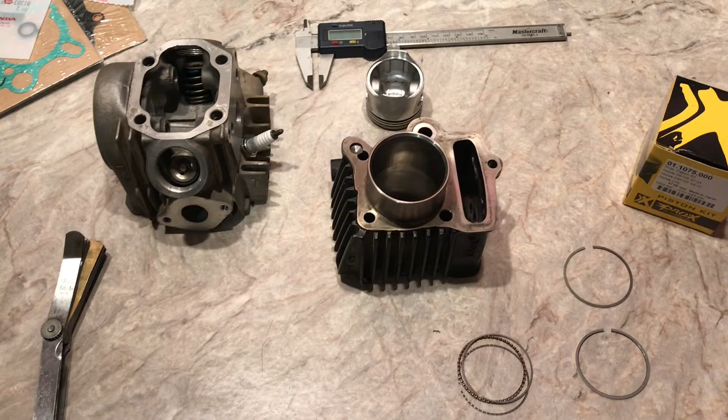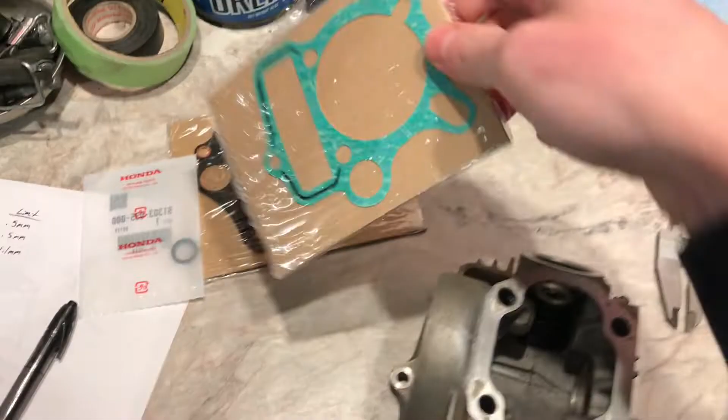Three months later, this COVID stuff is really messing up the parts supply. I waited like three months for this piston kit for this little CRF70, and I even have top end gaskets on order, some aftermarket ones, and they're still on back order. You can't get them in Canada right now. It's nuts. Initially I called Honda and they said a few months for the piston kit and gaskets, but I contacted them recently and they ended up having them in stock finally, so I figured we'll just get them.

I can hardly remember what I last got to on this little thing. I had cleaned the head, dumped it in my bucket of jet fuel, removed the valves, and replaced the valve seals, those little rubber guys in there. I scraped off what I could in the exhaust port, the carbon and whatnot, and quickly lapped the seats, but they really weren't that bad. So the head's clean and I got all the gasket surfaces prepared.

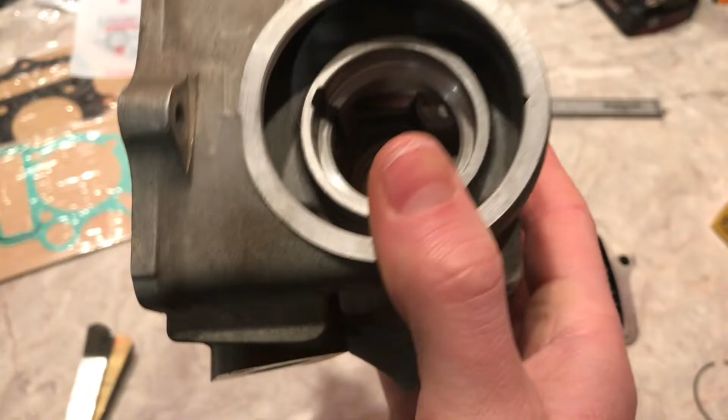For the cylinder, I'm essentially at the point where we go to check ring end gap before we start installing everything. Before installing any new piston, make sure you check these gaps on the new rings going in as well, otherwise you're going to cause big problems. But I wrote down what we're looking for here.

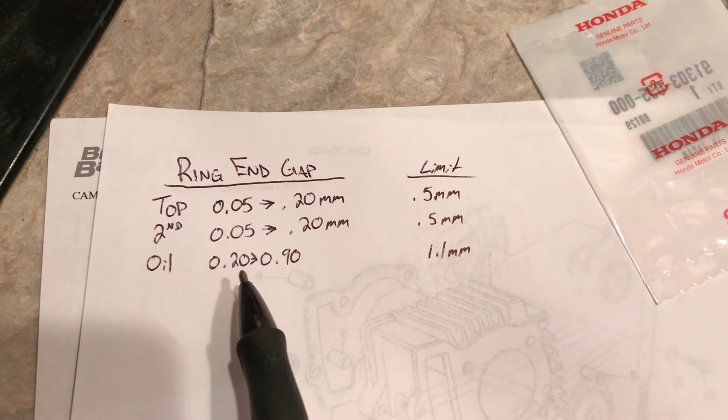So the top ring, this is all in millimeters by the way, is 0.05 to 0.2, same for the second ring. For the oil ring, you're not measuring the corrugated one since you can't really measure that guy too well, you're measuring this one and its partner. Make sure you check this before installing new stuff.

To do that, Honda wants them put in from the bottom of the cylinder, so I got it here. They don't really give a measurement in the manual that I see, so you just set the ring in. We'll do the top old one first. This thing is very worn, you'll see in a second.

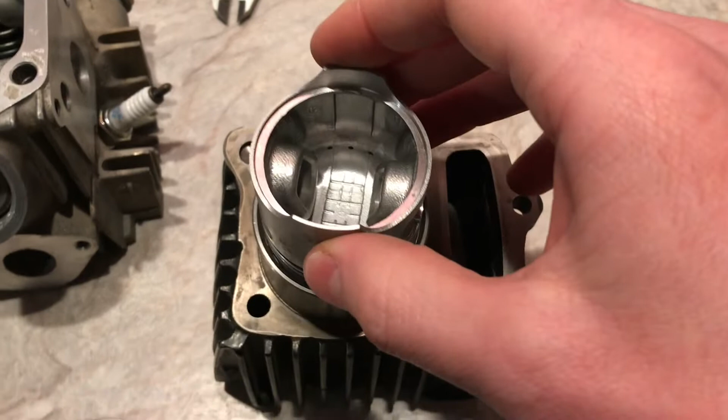Using the old piston just to make sure it's seated squarely in there. Look at that, that's not even... I could jam my whole feeler gauge set in that gap right there. Anyway, that's why this bike was running so poorly and burning so much oil.

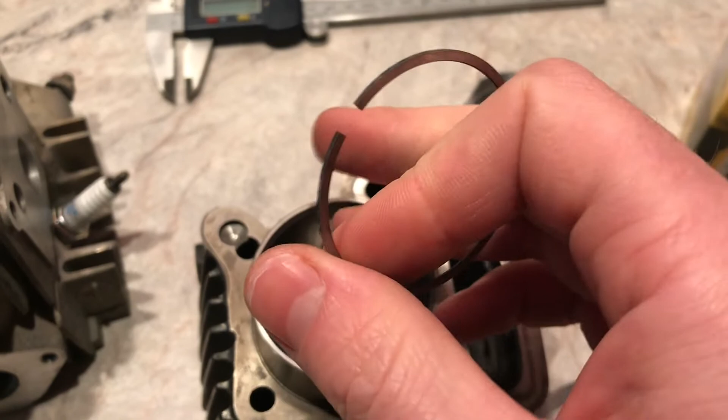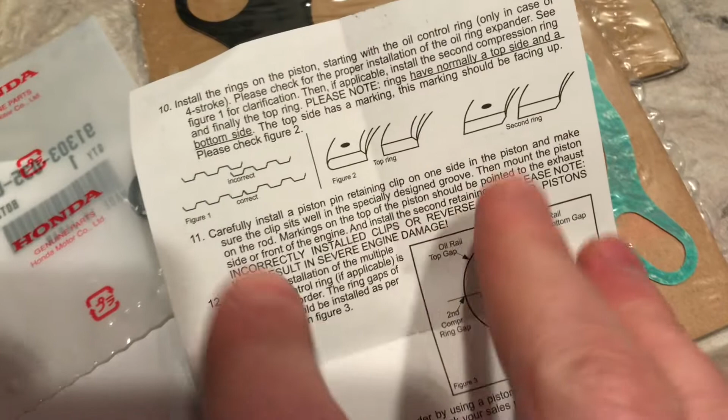So I got the new rings here. Here's these two without question, or these three I guess you could say - this is the oil ring. These two are much thinner and smaller, and if you're wondering which one goes on top and which on the bottom, Pro X and usually every piston manufacturer will send their little instructions with you. But you can see right here, the top rings usually have a bevel on the inside edge, a very slight bevel, and the second rings are usually a little more squared off.

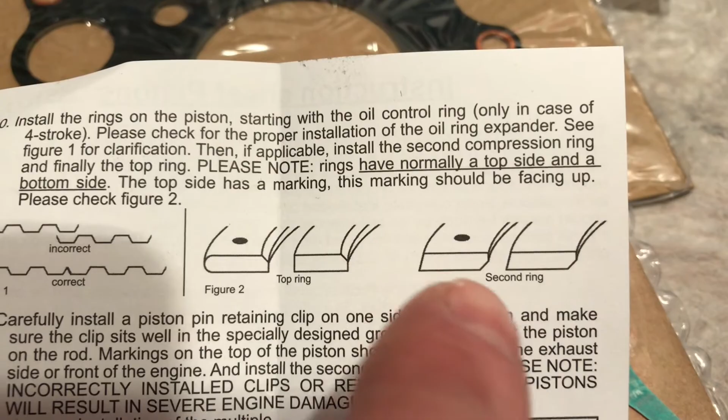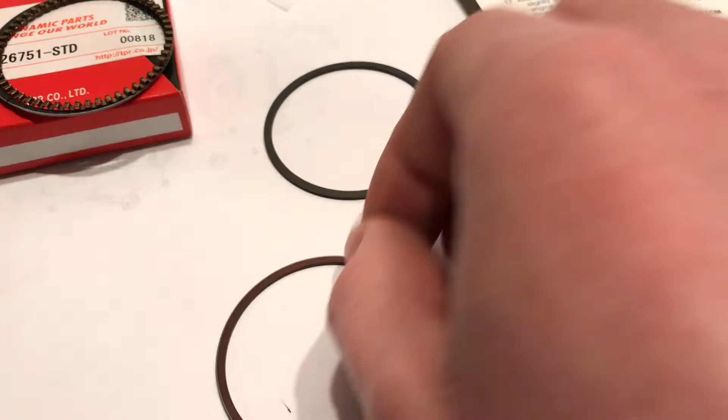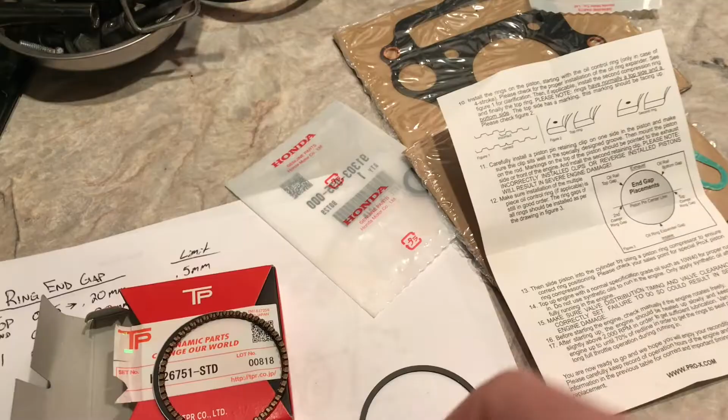These are really hard to tell apart because they're so small, and it's hard to tell with the camera right now. This one is heat treated or anodized, it's a different color, whereas this one's black and feels thicker, a little more square. Usually, though this isn't the case for everything so make sure you look it up, black colored ones that are thicker and kind of sharper is the middle ring, and this guy would be the top. But if you look at the end, this one does have a very subtle taper or beveled edge to it.

My camera's not going to focus on my phone, so you just have to take my word for it. This purplish, purple-brown looking one is the top ring. This is the middle ring, and then these - it's pretty obvious - this corrugated one just gets sandwiched in between these two guys.

All right, let's check the gap on the new ones. I don't think I really need to show you the whole process of measuring ring end gap, most of you should know how to do that already. Here's what I got.

Actuals are here, what we're shooting for is here, so we're above nominal a little bit, but we're well within the service limit. So let's go to the next step.

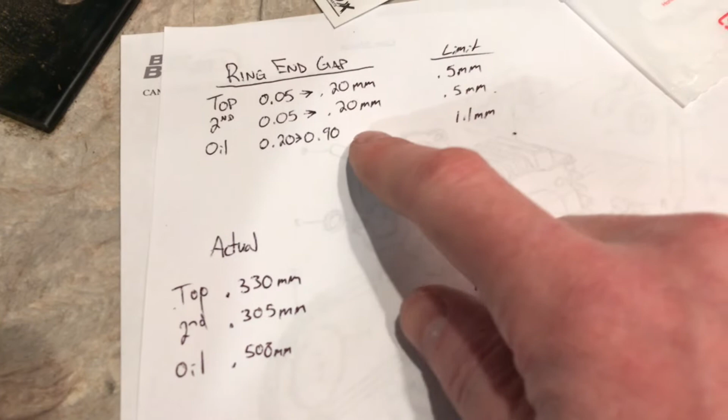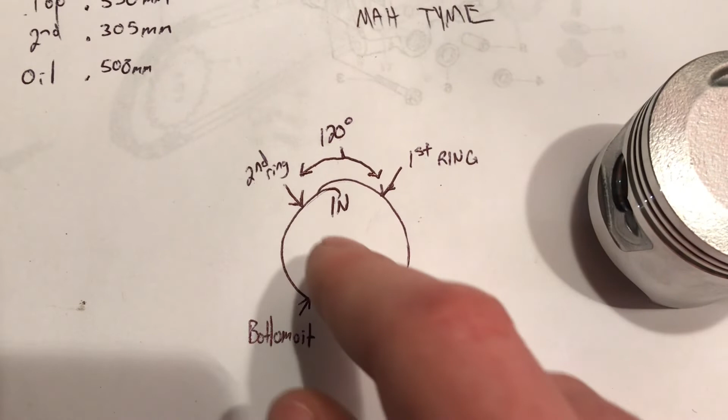Next is let's install the rings on the piston itself. I've got a little diagram here of how they show it in the manual, and this is my perfect circle here. I've got the piston sitting as this is sitting. The first ring, or the top ring, the gap is going to be over here somewhere. The second is going to be about 120 degrees away. Top oil and bottom oil.

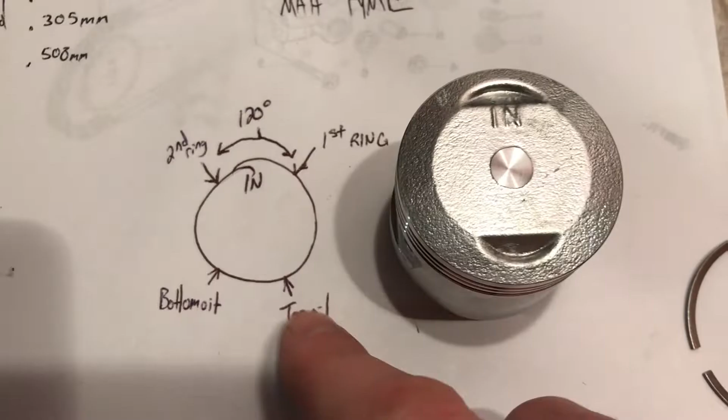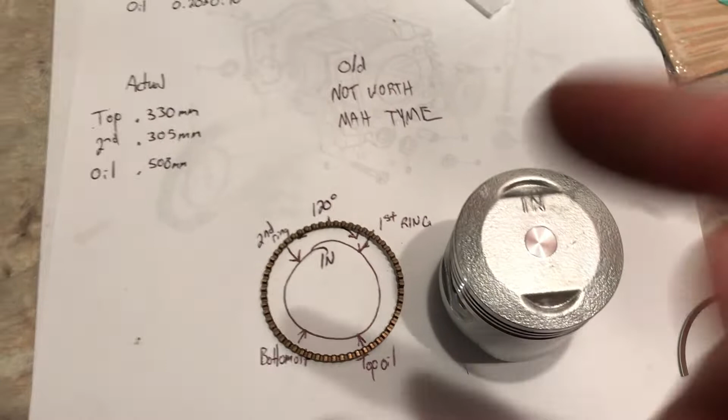I don't see a gap in the manual for the corrugated oil control ring, so I don't think there's really a right or wrong place to put this, but the gap is right here. I might just put it either here or over here, just to get it out of the way of all the other gaps. You don't want them all lining up, you'll lose power, and you'll have a better chance of blow by, which is what's causing the low power, and it might burn some more oil, which we're trying to fix here in the first place.

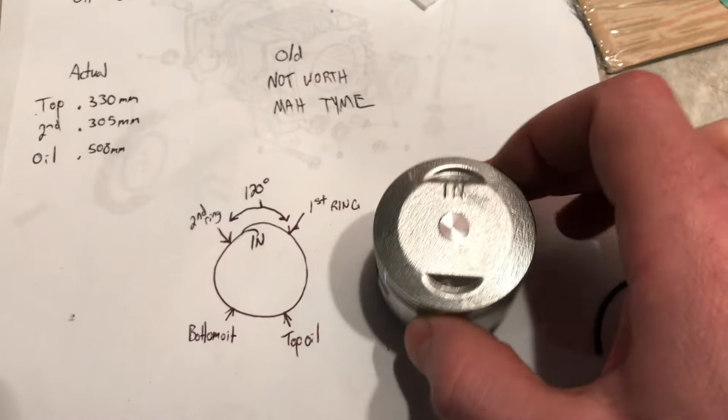Let's load up this cute little piston here with some brand new rings.

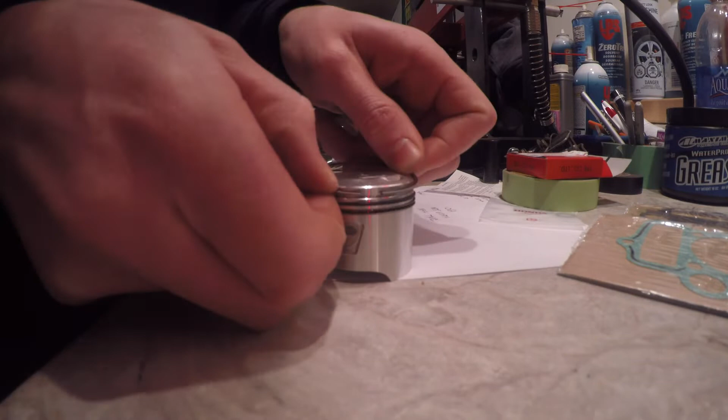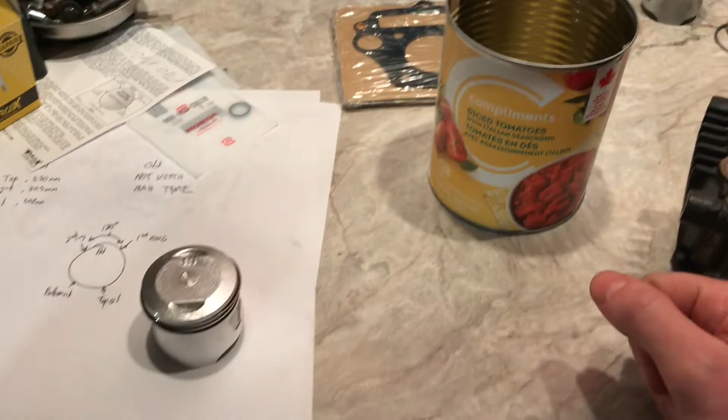With piston loaded up with new rings, it's time to throw it in the bike. Get yourself a little bit of Rotella oil to lube the wrist pin, and we're going to put it on the wrist pin and then clip the piston onto the connecting rod.

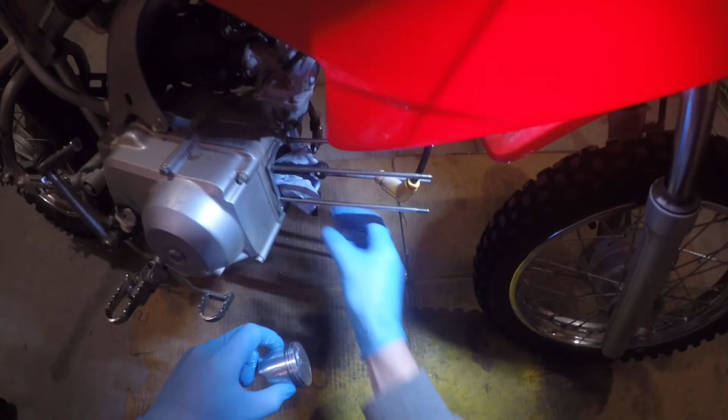Now putting these clips in can be a bit tedious. Use a pair of smooth jaw pliers to help you put it in there, you'll get it eventually. Always do one on the bench because it's easier than doing two on the bike, especially down on your knees on that CRF70. Put some grease on everything that needs it before we assemble it.

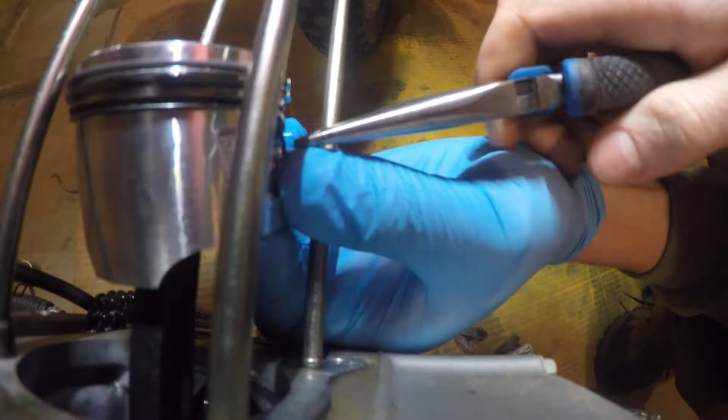The pin should just slide through without hammering on it or anything. And then go ahead and put your other clip in, and again, slide the gap around so that it's away from the cutout window.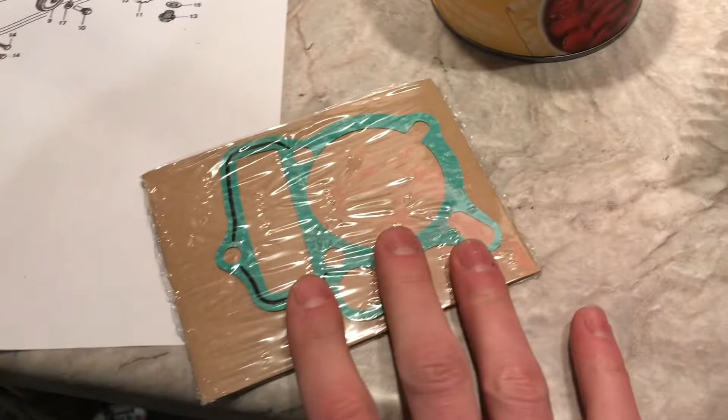So we got the cylinder base gasket here and the cylinder itself. Make sure you spread grease all around in here after you've cleaned it out. I wish I had a small enough hone to get in here to clean this guy up. This bore itself is 47 millimeters, or about 1 3/4 inch, so I wish I could clean it up to put some new cross hatching in it.

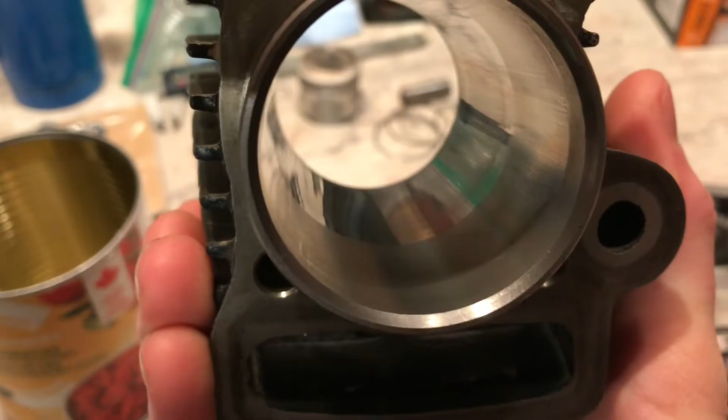There looks to be a bit of a line in there, but you really can't feel it at all. Ideally, I would want to scuff it up a little bit though, but it'll be just fine. Usually you're not putting new cross hatching in, you're not trying to cut or wear away at the bore too much. It's essentially just deglazing the cylinder.

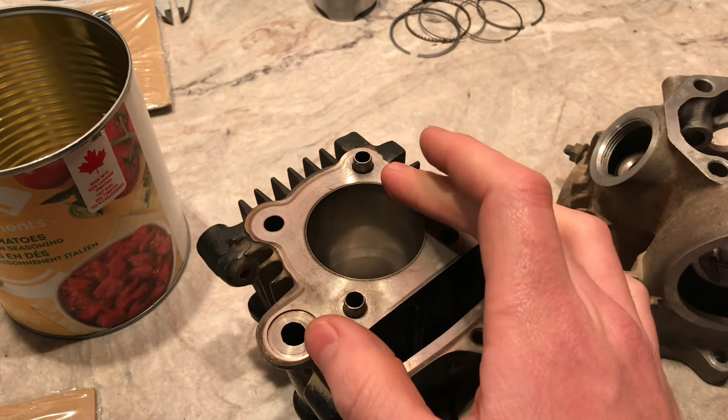I don't have a hone that small, so I just use a little piece of Scotch-Brite just to rough it up, and make sure you clean the bore out really well afterwards, because you'd be surprised with the debris that comes off of even a Scotch-Brite. So I'm going to do that, rub it with some grease and get this gasket on.

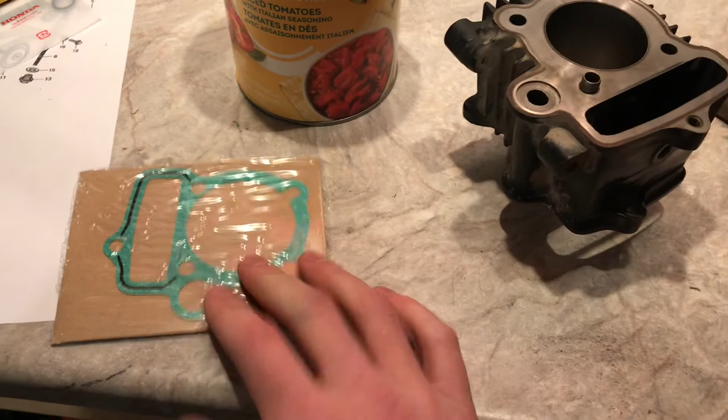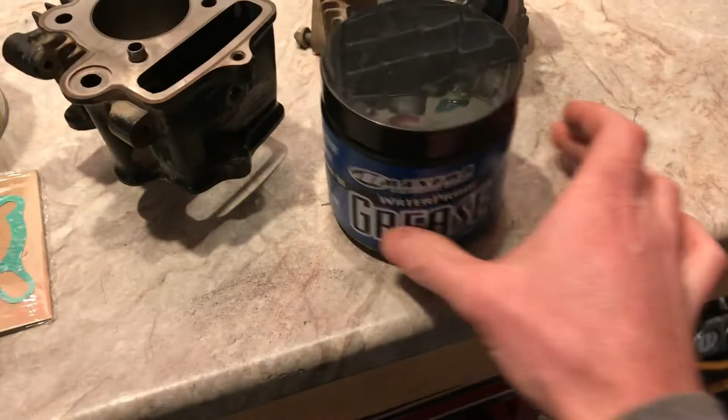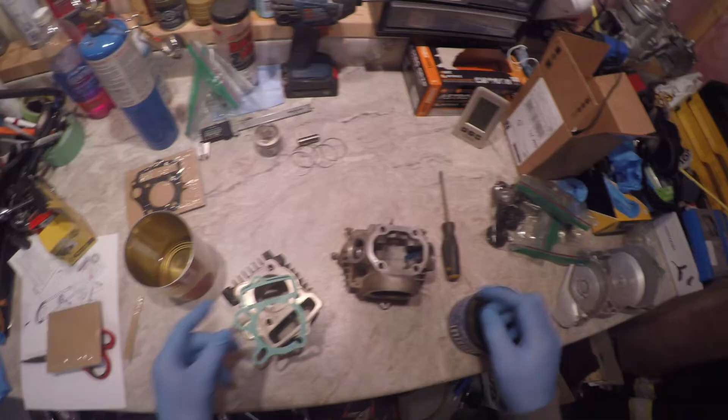Pro tip for gaskets: if you mess up and go to take this back apart right away or something like that, I always grease the gasket surfaces a little bit, just enough to put a film on it. You can save a gasket next time it comes off. I know you're not supposed to, but this is the real world, right? On this little wee dirt bike, if a guy needed to get back in there, he's going to be thanking me, or even on the next rebuild, you'll be thanking yourself that you greased this, because you won't have to scrape it off as much. And you don't need to drown the gasket in grease, you just need to kind of work it in, just a film on there is all you really need.

Slide it over the studs. Make sure you feed the cam chain through along with the piston.

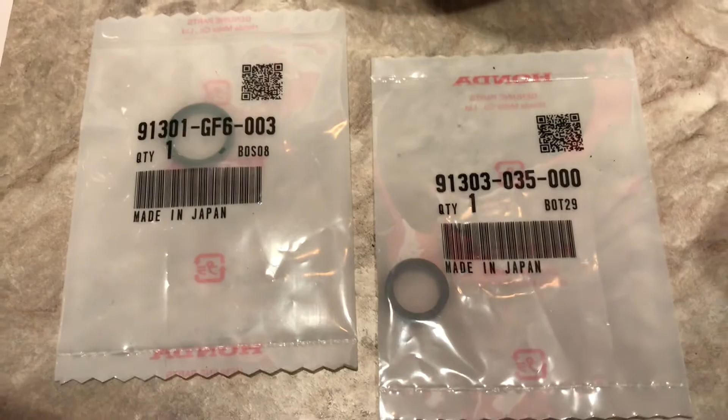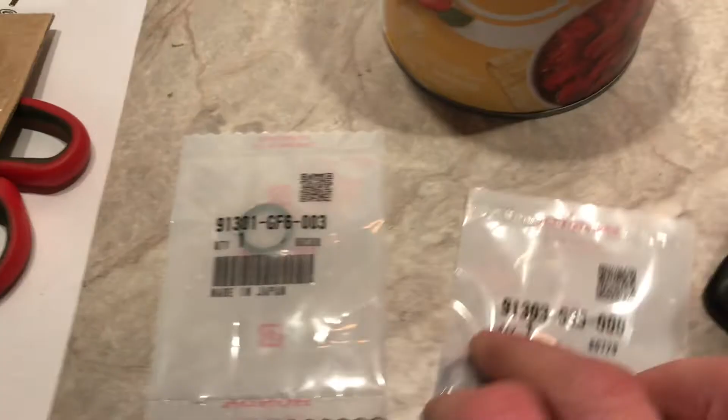Don't forget these little O-rings. These are the Honda part numbers: 35-000, this one is the cylinder base, so that goes right there. And then this one goes on top of the cylinder, in this little embossed crevasse right there. So don't forget these before putting it all together, otherwise you're gonna have a shitty oil leak.

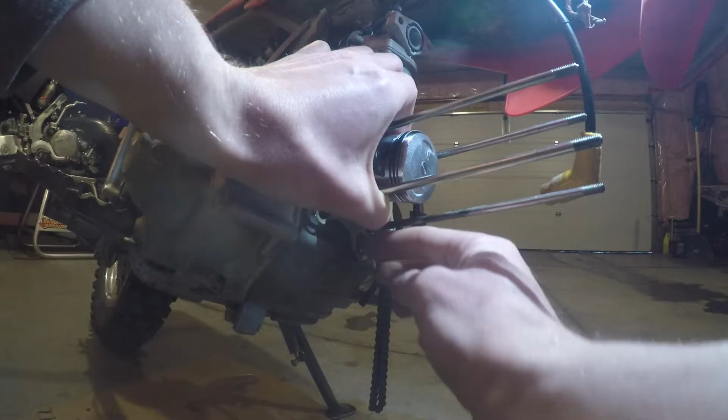Just press that seal into position. It should kind of stay there itself, but keep an eye on it obviously as you're installing the cylinder.

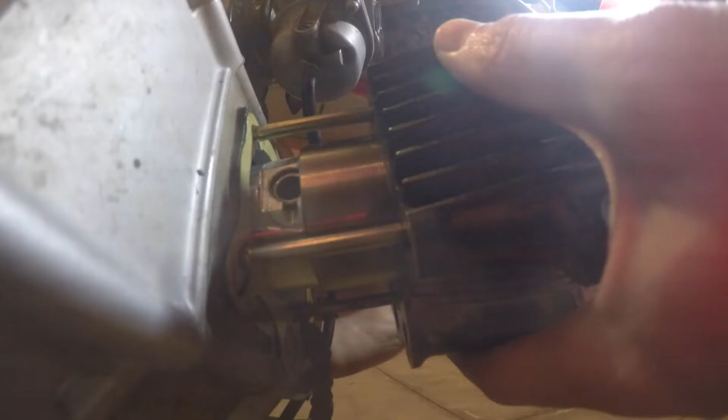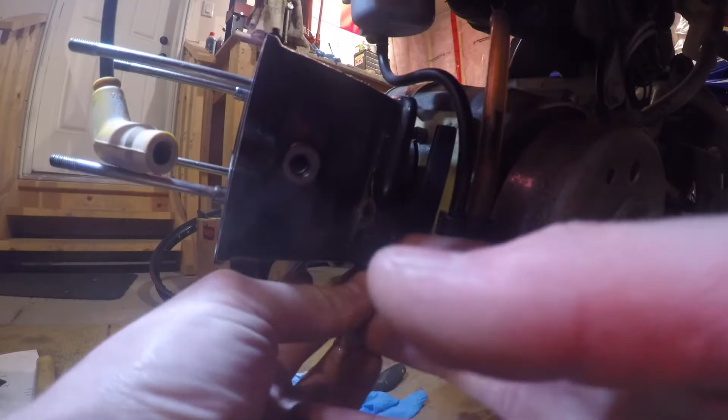Again, this is tedious, took me probably about 5 minutes. I straddle the bike because it's easiest to do that way. But you'll get it. Compress the rings, turn the flywheel to help push the piston up through the cylinder. It's nice and tight, and it didn't want to go on that easy, but you'll get it. And before you seat the cylinder the whole way, feed the chain through.

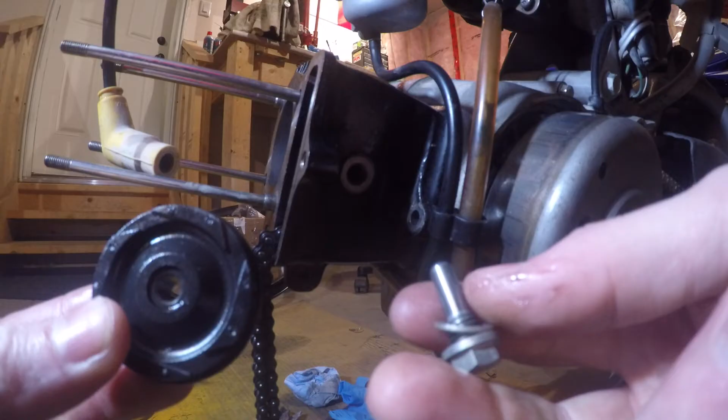Then install the little idler, the chain idler. There's a washer under the head of this bolt itself, so make sure you don't lose that too.

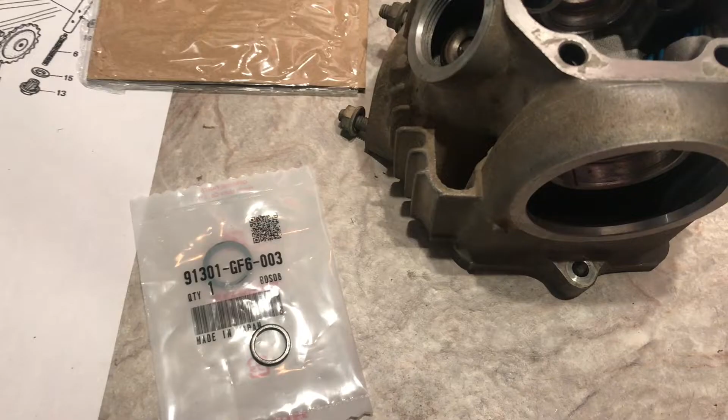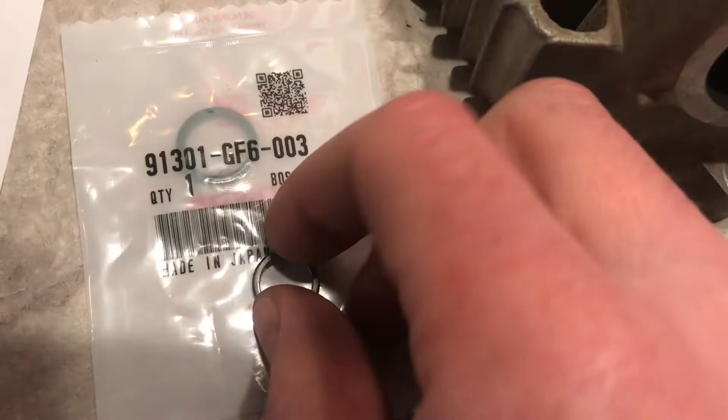Alright, next is the head. Also very important, on a note I forgot to mention before, this is the kind of squared off O-ring that seals the cylinder to the cylinder head, along with obviously the metal gasket. This guy, don't lose it when you take it apart. There's this little washer, and this fits inside here just to kind of give it some structure. So anyway, just a point to mention, don't lose this.

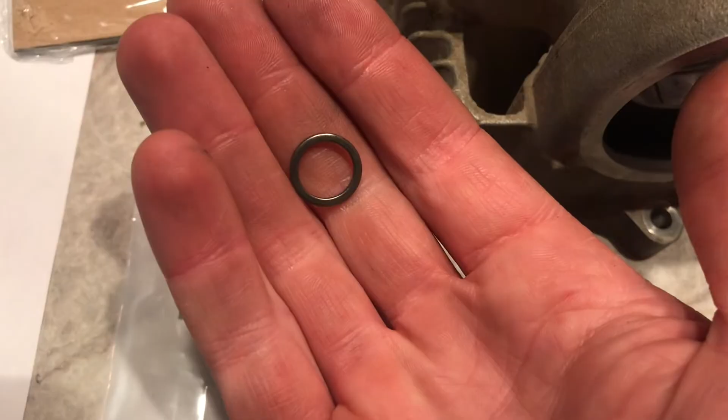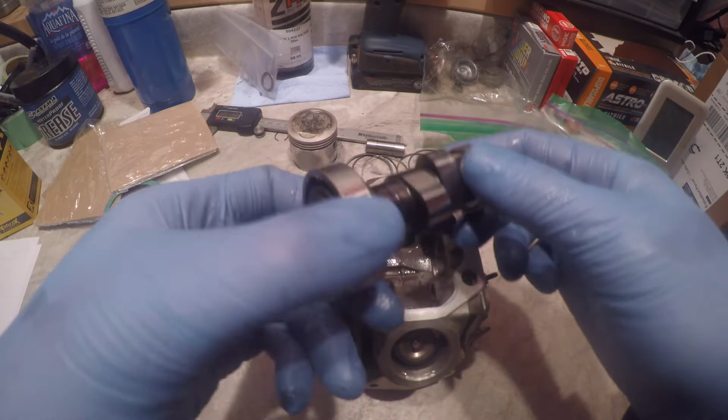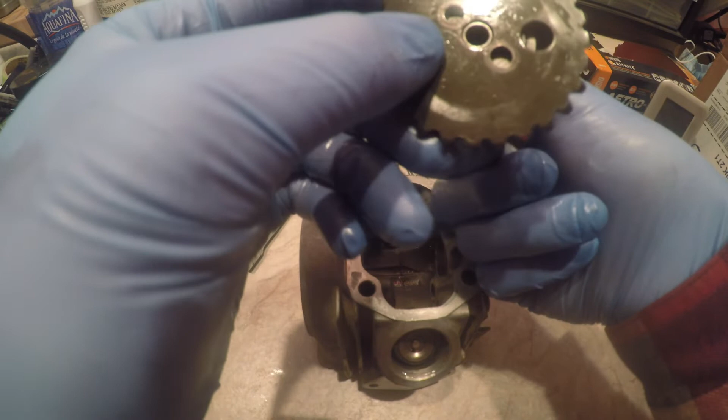Then assemble the head on the bench before we put it in the bike. The cam sprocket can technically be put on two ways, 180 degrees out, but you can't physically install it wrong, because the lobes would be pushing down the rockers and you wouldn't be able to even get it to spin that way. So it is, in a sense, foolproof, but essentially the lobes need to be facing down. You install these rockers, push the pins in all the way. Again, everything's coated in a fresh layer of oil. Seat them in all the way, and then with the lobes facing down, you can be sure that you'll get the timing right.

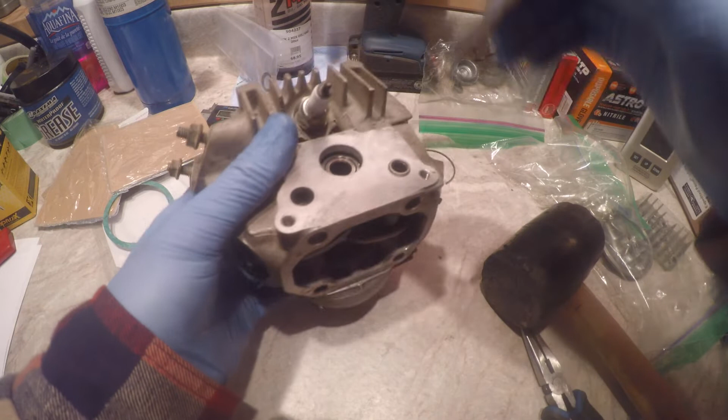Some of the rocker pins might just need a little bit of help to get in. And there we are. So the lobes, you can't see them in the head, but they are facing straight down.

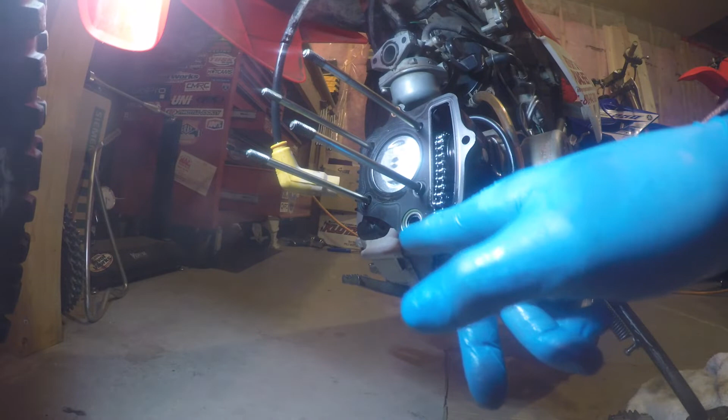So make sure the gasket's there before we close this up. Once again, slide the chain through, pull it out, and it'll kind of just sit off to the side. This arrow on this end cap goes down, and this copper washer is different than the other three, it goes on that stud right there. And then there's a nut that looks different than the others, and it goes on that stud right there. Don't ask me why, but check the IPC, and that's how it is.

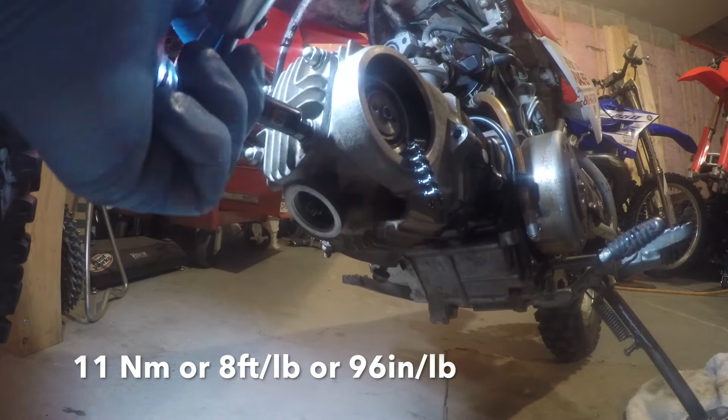Torque those nuts down to any one of these values depending on your wrench. And then the two bolts, the one that holds the cylinder to the case, and this one here, make sure you tighten them down too. You can't get a socket on them, so use a wrench.

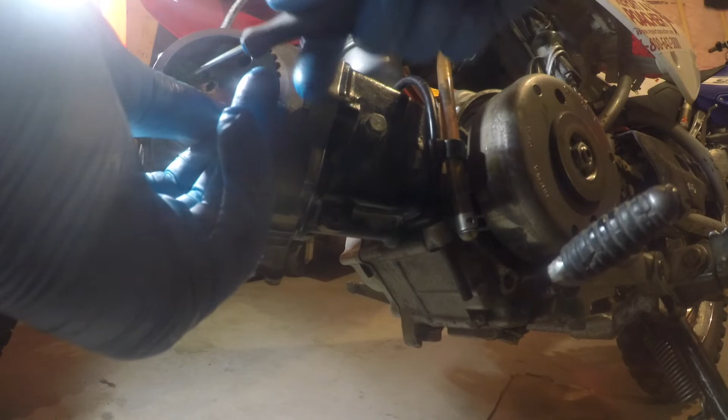And then we'll time it up here. So there's a T marked on this flywheel and a cutout in the engine case, so that has to be lined up together. You can do this without removing the tensioner assembly, it's really not that hard. So what I do is I push the chain, it'll kind of sit up there around the bearing housing, and then you use a little screwdriver to start the sprocket, with the timing circle facing directly forward, and it should line up with the cutout in the head itself.

And then you just kind of wiggle it around, and it will seat in there. As you can see, it just needs a little bit of prying, ever so slightly, to snap it onto the camshaft. Then you install these bolts here, torque them down, and double check your timing marks when you're all said and done. The T needs to line up, and that circle on the sprocket needs to line up, and it's really not that hard.

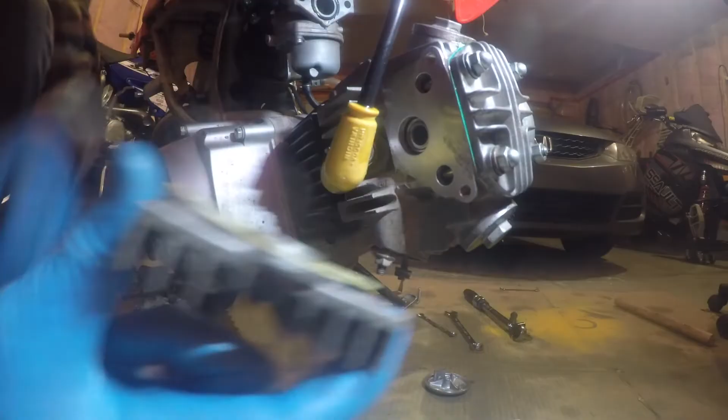And it's just a matter of firing everything else on. The through bolt for that cover on the other side, make sure that tang is resting on the top of the stop, and there's the torque value for that one too. You'll want to torque that one properly just to save your own skin. Attach the intake elbow, attach the exhaust.